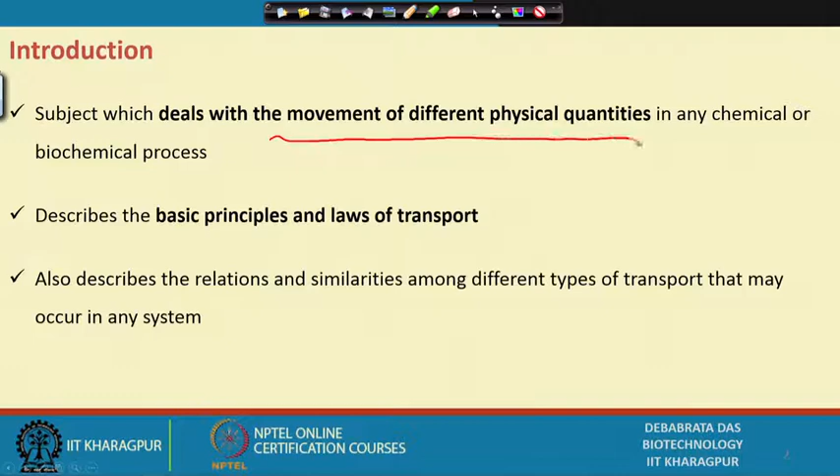Now let me start with this: the subject deals with the movement of different physical quantities in any chemical and biochemical process. I told you there are three types of movement: momentum, heat transfer, and mass transfer.

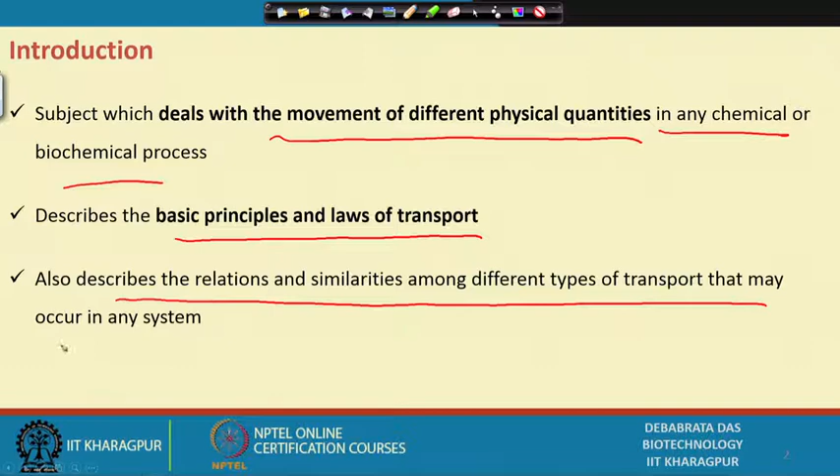We will describe the basic principles and laws of transport, and also describe the relation and similarity among the different types of transport that may occur in any system. Let us see the classification of transport phenomena. We have three different classifications: momentum transport, energy transport, and mass transport.

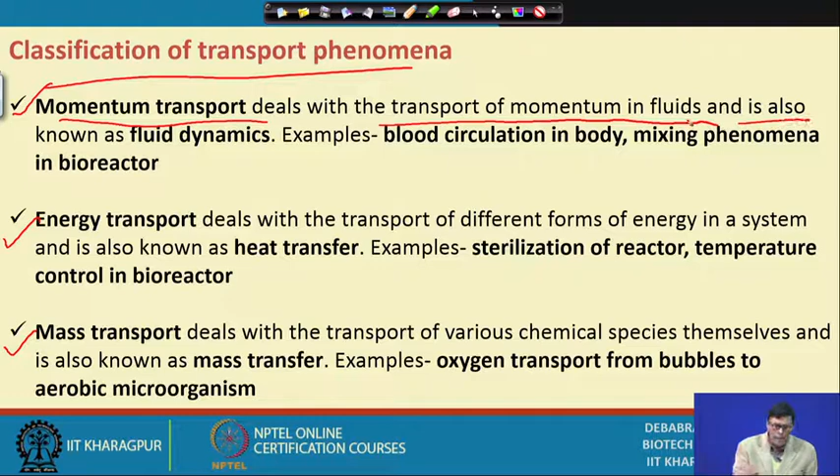What is momentum transport? It deals with the transport of momentum of fluid and is also known as fluid dynamics. For example, blood circulation in the body, and mixing phenomena in the bioreactor, both come under momentum transport, because this is very easy to understand. The mixing phenomena I just explained.

Energy transport deals with the transport of different forms of energy in a system, and is also known as heat transfer, for example sterilization. I forgot to mention that the sterility of the reactor is very important, because we want to grow our desired organism in a particular environment so that we can get the desired product.

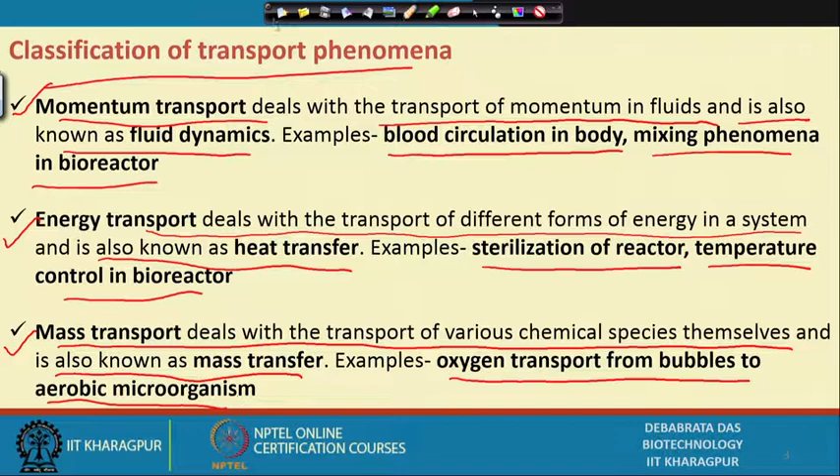Also temperature control in the bioreactor is important. Organisms are very specific with respect to temperature — at a particular temperature they give the maximum product. Mass transfer deals with the transport of various chemical species, as for example oxygen transferred from the bubble to the aerobic microorganism. So we can easily understand how crucial the transport phenomena is as far as biochemical processes are concerned.

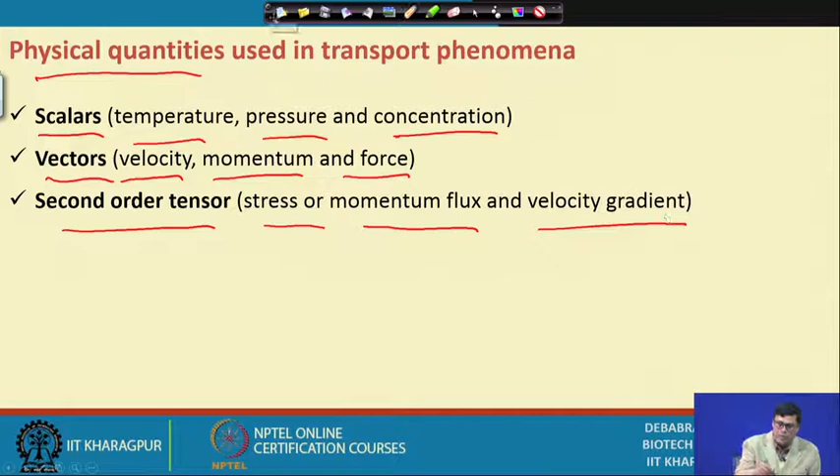Now when you try to solve it, we come across different physical quantities. One is scalar — scalar means it has some value, as for example temperature, pressure, and concentration. Vectors have some direction, like velocity, momentum, and force. And second order tensor is the stress or momentum flux, and velocity gradient. These are the different quantities we use while describing transport phenomena.

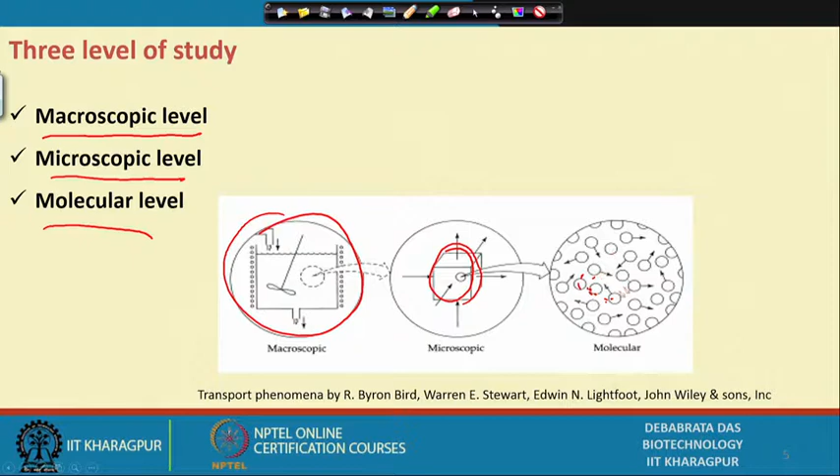Now if you look at the three levels of study: one is macroscopic level, another microscopic level, and the molecular level. In the macroscopic level, you study what is happening inside the fermenter. Then you might use some kind of cell, or study a particular portion of the liquid in detail — this is the microscopic analysis. Molecular level means how the molecules inside the cell are interacting with each other to give the product. So these are the three different levels of study.

Now there are three axioms. Mass is conserved, which leads to the equation of continuity. Momentum is conserved, which leads to the equation of motion. Energy is conserved, which leads to the equation of thermal energy. These three equations are collectively called governing equations. On the basis of mass conservation, momentum conservation, and energy conservation, we can try to solve this.

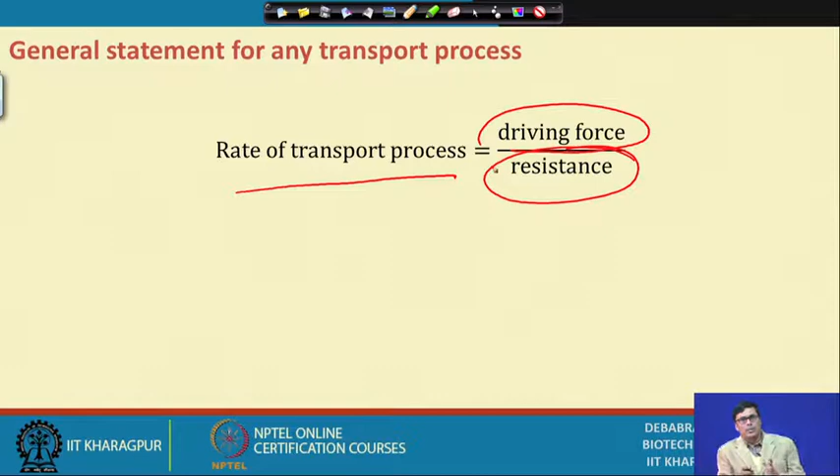Now, the general statement of transport processes: the rate of a transport process is the driving force divided by resistance. Driving force means, suppose you want to heat some liquid — what is the driving force? The driving force is the temperature difference, and resistance is the media that hinders that flow of heat.

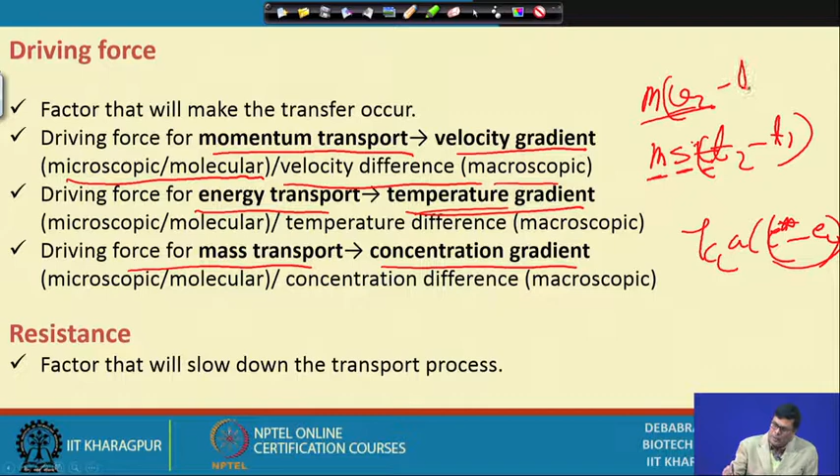Now we can explain this driving force like this. The factor that makes the driving force for momentum transport is the velocity gradient, whether microscopic or molecular — a velocity difference. Momentum, as we understand, is mass into velocity, so the velocity gradient plays a very important role. For energy transport, the driving force is the temperature gradient — we know MST, where mass is specific heat and temperature, so the temperature gradient plays a very important role. And the driving force for mass transfer is the concentration gradient, like KLA into C star minus CL — that is the gradient. Similarly for heat, T2 minus T1 is the gradient, and for momentum, V2 minus V1 is the gradient — these are the driving forces we have.

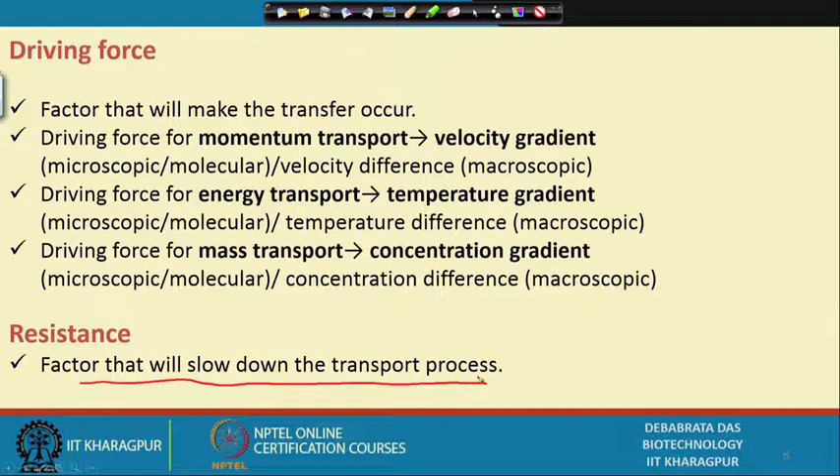The resistance factor is what slows down the transport — the purpose of resistance is to slow down the transport processes. Interestingly, the mechanism of transportation — momentum, heat, and mass transfer phenomena — usually takes place by two different means: molecular transfer and convective transfer. In case of heat transfer, another mode of transport exists, called radiation, which is not applicable in case of mass and momentum transfer. Radiation transfer is applicable only in case of heat transfer, and is not much important for momentum and mass transfer phenomena.

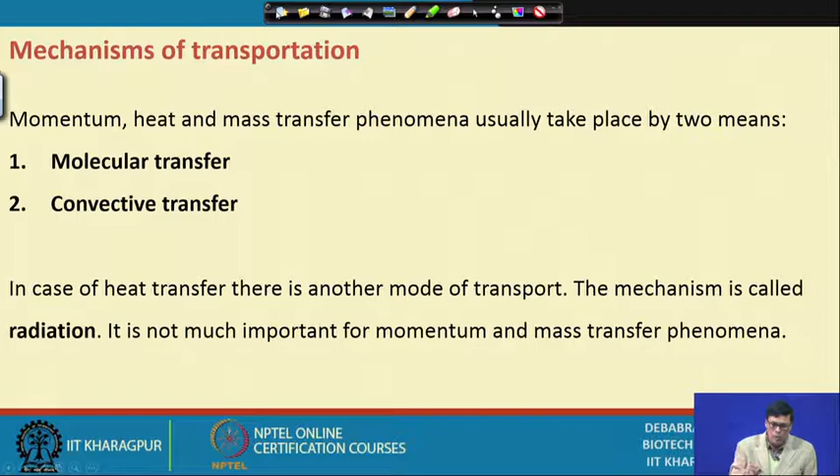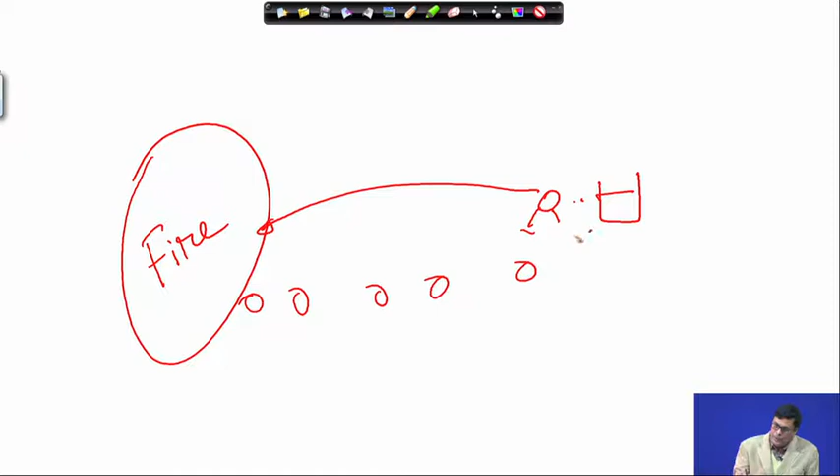Now let me explain more elaborately what this means, with a small example. Suppose there is a fire here — we want to extinguish the fire. The fire can be extinguished by three different phenomena. One is, we know water is the best media through which we can extinguish fire. So we have a bucket of water, and this bucket of water can be transferred in three different ways. One person can carry it directly to the field. Another way, different people can stand in a line and hand over this bucket from one to another to transfer it.

Another way, we can use a pump. With the help of a pump, we can pass this water. So three different means we can do that. Now if you look at these three different means, they serve three different purposes.

Here the person is physically moving with the material. Am I right? This is with material, they are moving. But here the person is not moving, but the material is moving - that is 1, 2, 3, like this. And here with the help of a pump you are doing this. This particular pumping can be explained with the help of what you call radiation, and these particular things may be considered as conduction, and this is considered as convection.

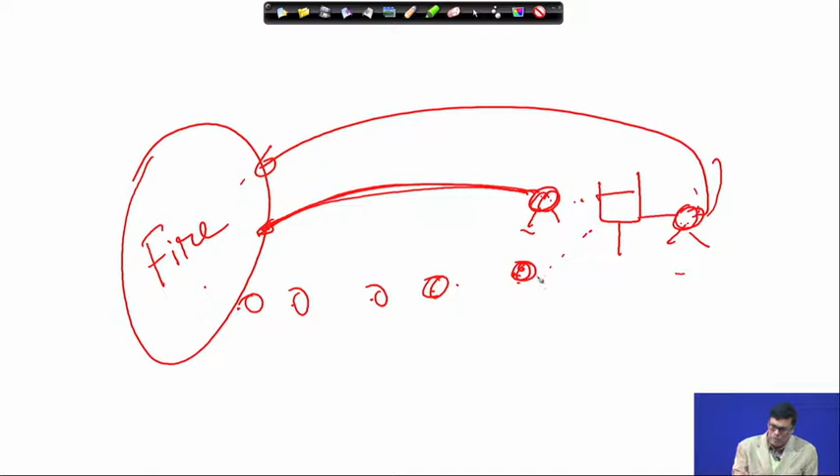Now if you transfer molecular momentum, how can you calculate it? Suppose there are two plates - this is one plate and this is one plate. Stagnant water is there between them. All of a sudden you move this bottom plate, then what will happen? The velocity of the fluid will be like this - the profile will be like this.

This can be explained with the help of Newton's law of viscosity. This is the shear stress, am I right? And this is the shear rate. So this is equal to mu into this. And what is mu? Mu is considered the viscosity of the liquid. So viscosity is basically nothing but shear stress divided by shear rate.

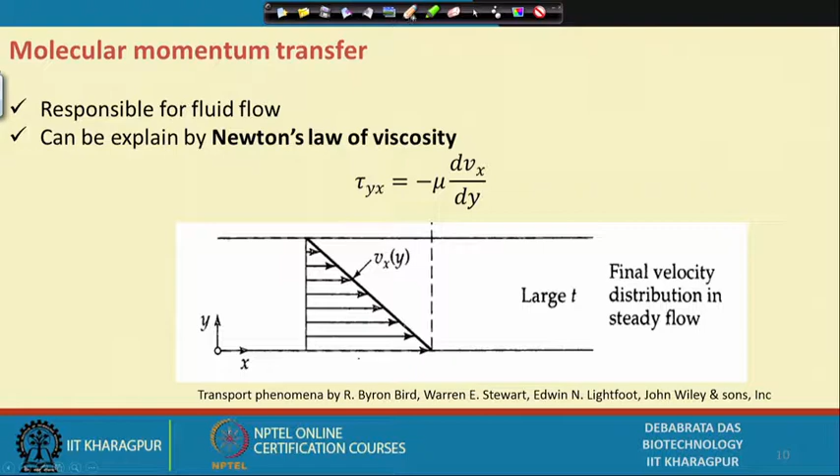The viscosity is the proportionality constant of Newton's law of viscosity. It is a measurement of resistance to gradual deformation by shear stress. For example, honey has much higher viscosity than water, and also called dynamic viscosity.

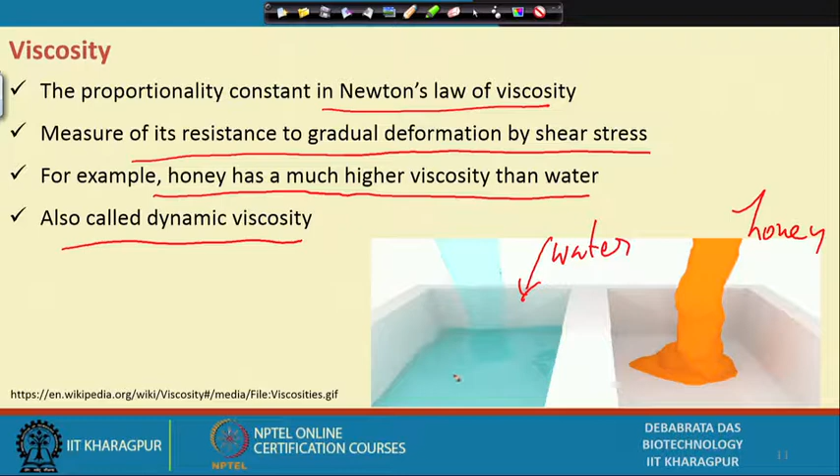So here if you look at the pouring of water - this is water, and this is honey, am I right? Honey has higher viscosity, so the way it pours is different, while water is spreading very easily. So this is how we can explain that.

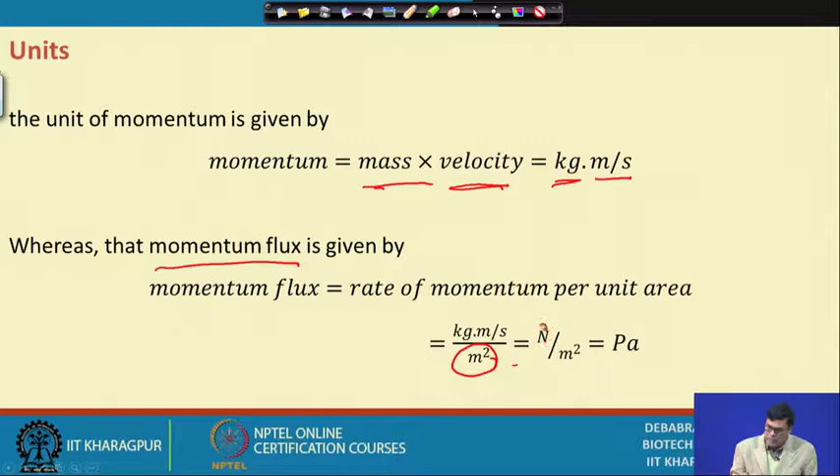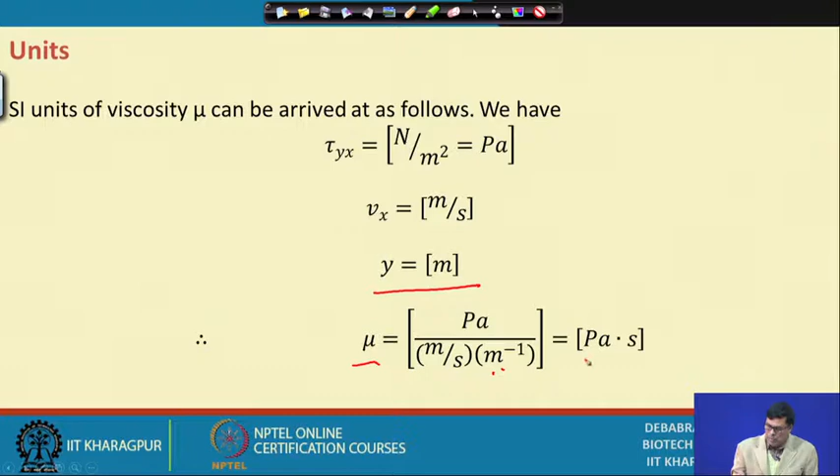This is usually expressed as Pascal. Now shear stress, as I told you, is nothing but Newton per unit surface area - this is Pascal. And this is the velocity, Vx is the direction, because if you look at the direction of flow, maybe this is x, this might be y, or this might be z, and this might be y - it can move in different directions. So this is the x direction. Y is in meters, and viscosity is equal to Pascal per meter per second, and meter inverse, so Pascal second. Now similarly we can find out what should be the unit for viscosity.

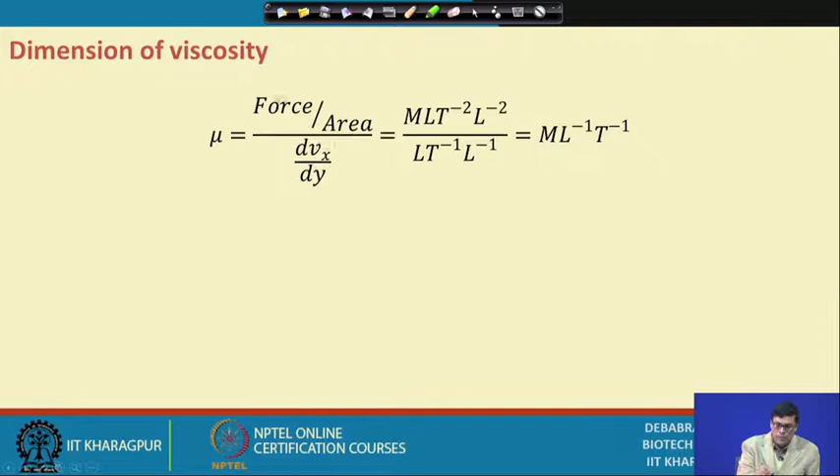This is, as I told you, shear stress by shear rate. If you solve, we will get this equation. Now, Newtonian fluid - what do you mean by Newtonian fluid? Fluid which obeys Newton's law of viscosity. All gases, most liquids which have simpler molecular formula and lower molecular weight, such as water, benzene, ethyl alcohol, carbon tetrachloride, hexane, and most solutions of simple molecules are Newtonian fluids. So this is how Newtonian fluid can be defined.

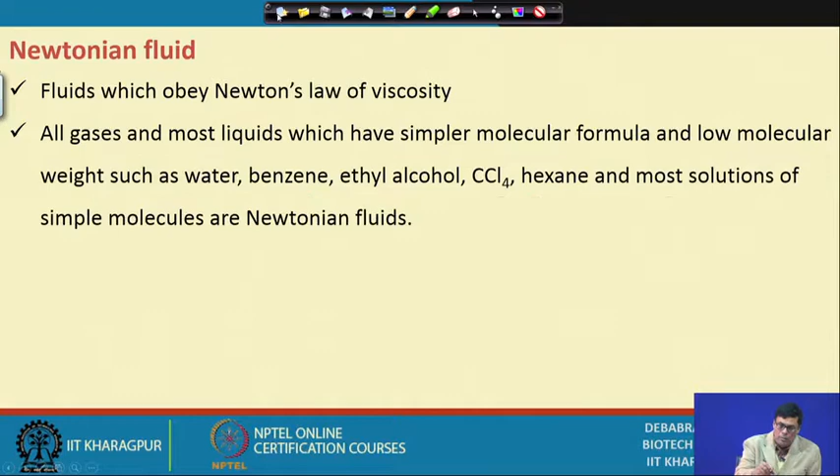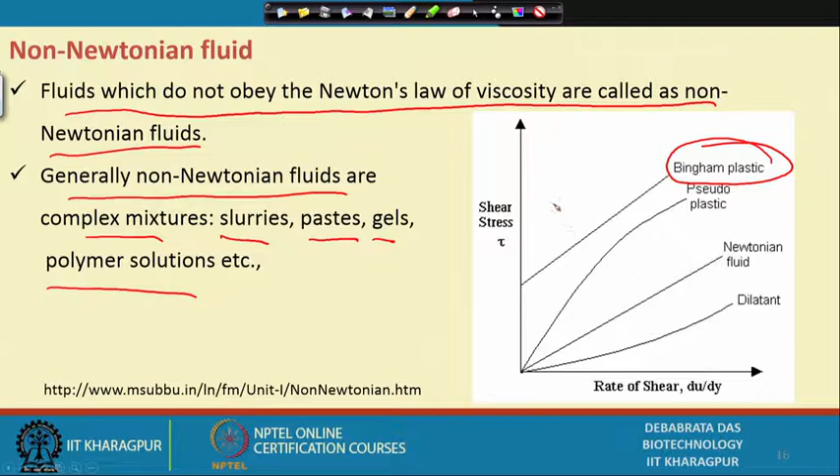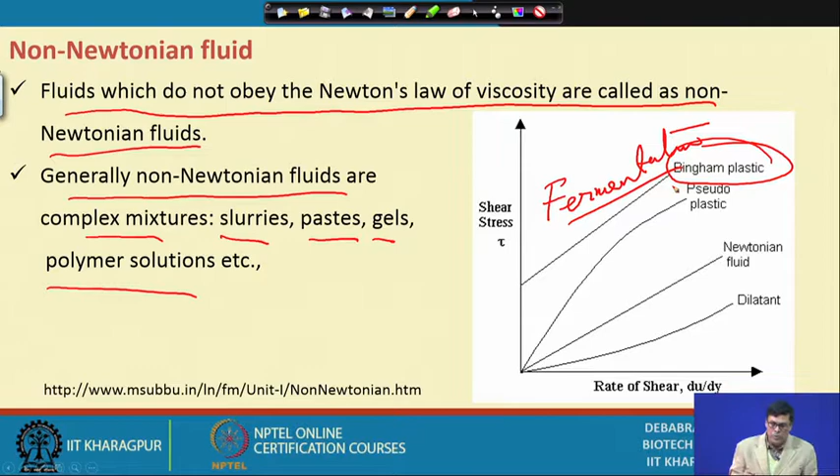Some fermentation broth behaves like Bingham plastics, so this is also a non-Newtonian fluid. It is not Newtonian; if it were Newtonian, it would follow this relation.

Now convective momentum transfer, which I already explained to you. The transportation can be done from the bulk flow of the fluid, and that fluid enters with the velocity Vx. Then what will the momentum be?

This is Vx into rho, Vx into rho into V. What is rho into V? V is the volume, and rho is the mass per unit volume. Volume will cancel, leaving mass. Mass into velocity gives the momentum flux per unit volume.

Similarly, for the velocity in the y and z directions, we can have momentum flux like Vy rho V and Vz rho V. We know that when we multiply this flux by the perpendicular area, we can calculate the force, as I have already shown you before.

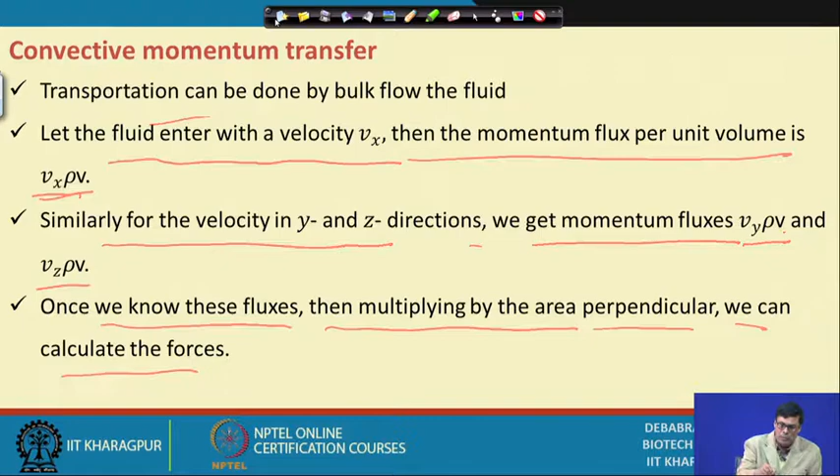There are different boundary conditions at the solid-liquid interface. There will be no-slip flow, and in case of a liquid-liquid interface, free-slip flow occurs. At a gas-liquid interface, the shear stress will be zero. That is the boundary condition we have.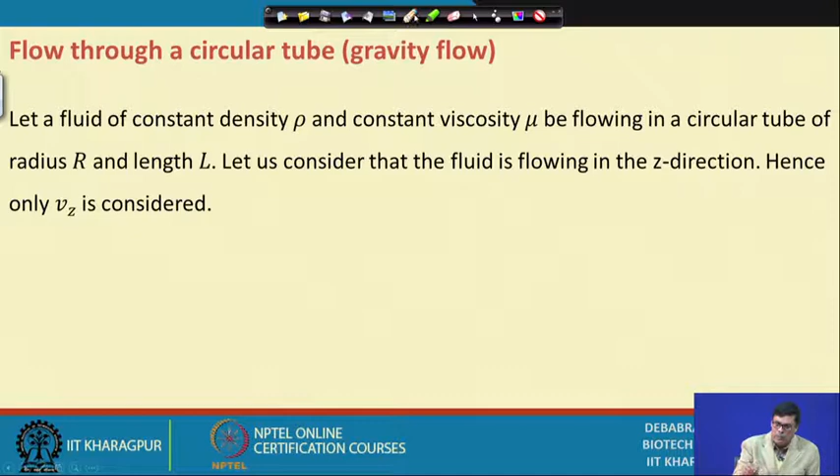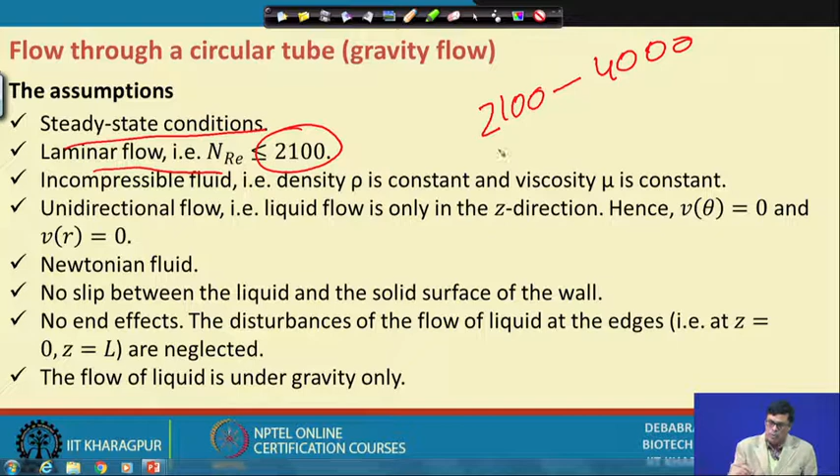For the flow through the circular tube, the following assumptions are made: one is steady state condition, and laminar flow, which occurs when the Reynolds number is less than 2100. From 2100 to 4000, it is transient - neither laminar nor turbulent - but below that it is Newtonian laminar flow. At 4000 we have turbulent flow.

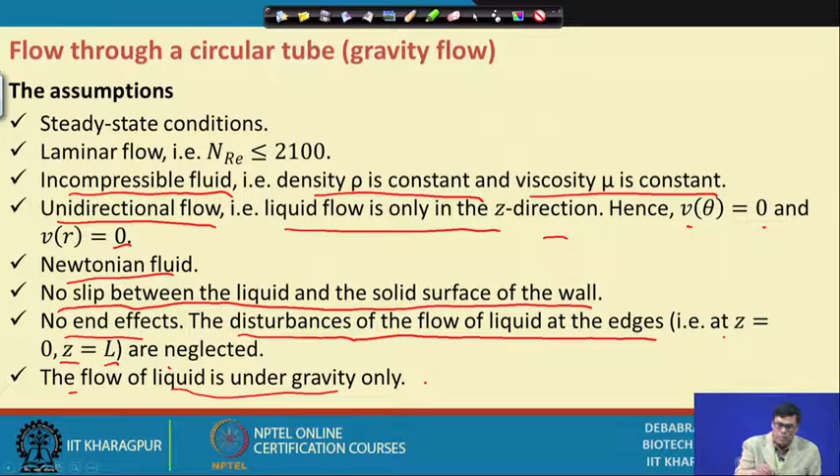The fluid is incompressible, so density is constant and viscosity is also constant. For unidirectional flow, the liquid flows only in the z direction, so v theta equals 0 and Vr equals 0. It is Newtonian fluid, with no slip between the liquid and the solid surface of the wall, no end effects - disturbances of flow at the edges where z equals 0 and z equals L are neglected, and the flow of the liquid is under gravity only. These are the assumptions we made to analyze this fluid.

Now let me explain the flow through the circular tube. Under these assumptions, the momentum is considered as follows: the molecular momentum flux is tau Rz, and tau theta z equal to 0 and tau zz equal to 0, we assume this.

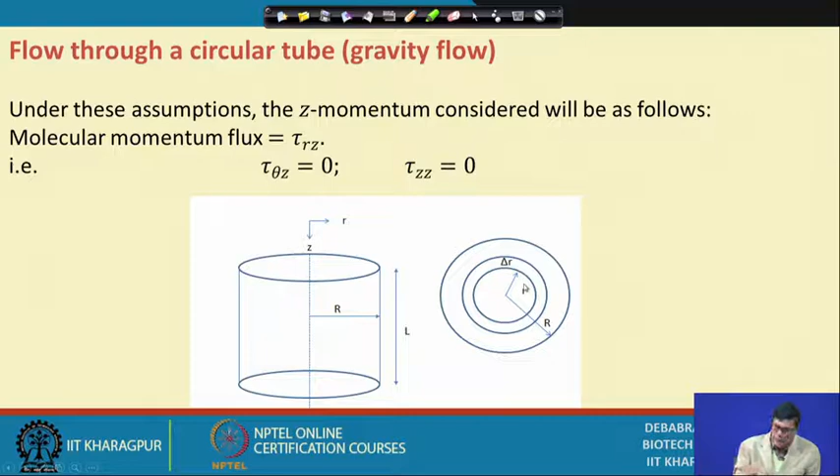Here we also consider a segment - you can see this segment, this is the del R we consider, so we integrate from R to R plus del R.

So the flow through the circular tube can be explained as: rate of molecular momentum in across the cylindrical surface at R, minus rate of molecular momentum out across the cylinder at R plus del R, plus the gravity force acting on the fluid - this should be equal to 0.

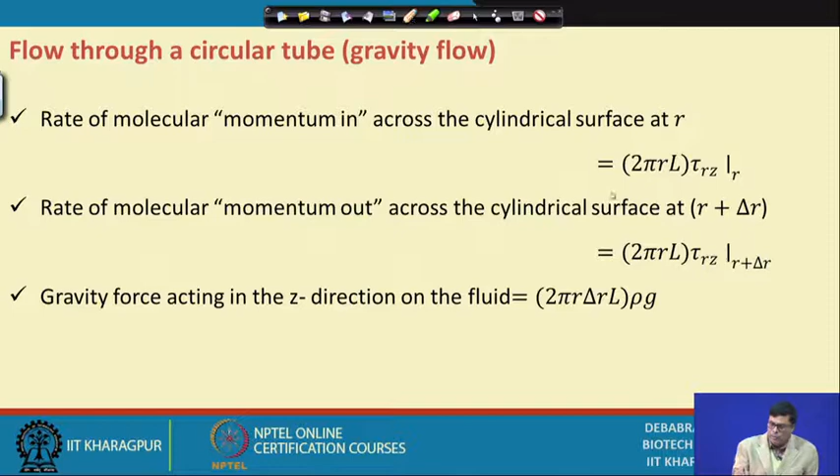Now the rate of molecular momentum in can be explained like this - this is the surface area, per unit surface area, so tau Rz at R. Then this is at R plus del R, and for the gravitational term, you multiply by rho g to get the gravitational force acting in the z direction on the fluid.

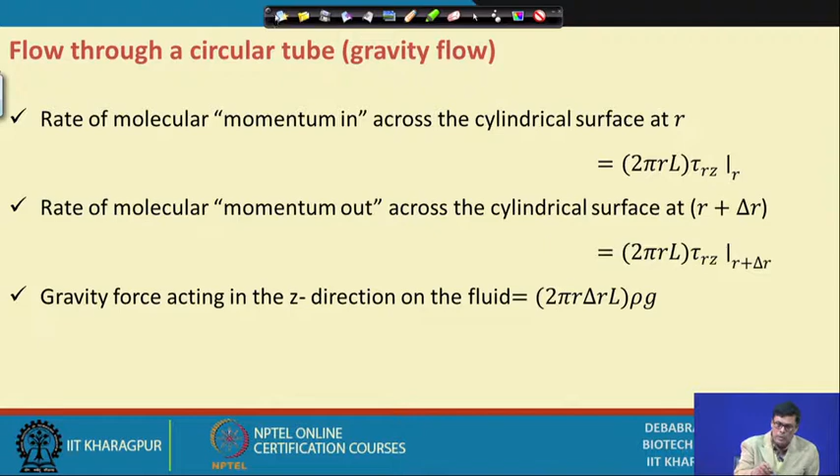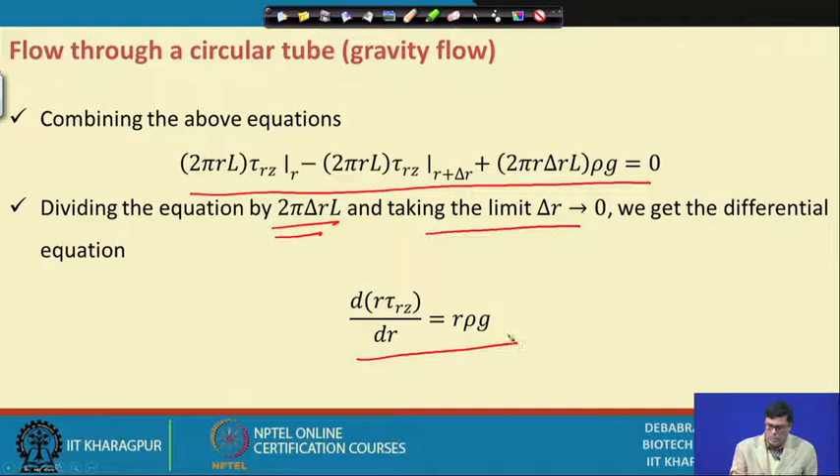Now combining this whole equation, we get it equal to 0. We divide by 2 pi del R into L, and taking del R tends to 0, we get this differential equation, which simplifies to R rho into g.

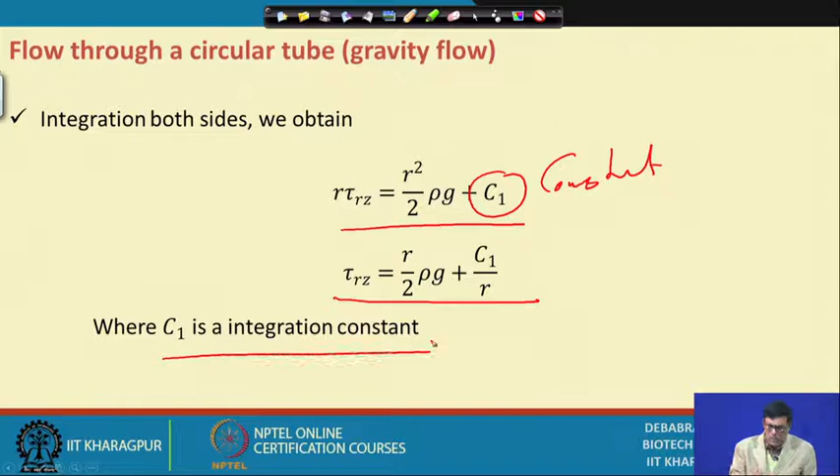Then through integration, if you look here, we do the integration and get this result, where C1 is the constant. Then dividing by R, we get this equation, where C1 is the integration constant. So for flow through the circular tube, what happens if R equals 0?

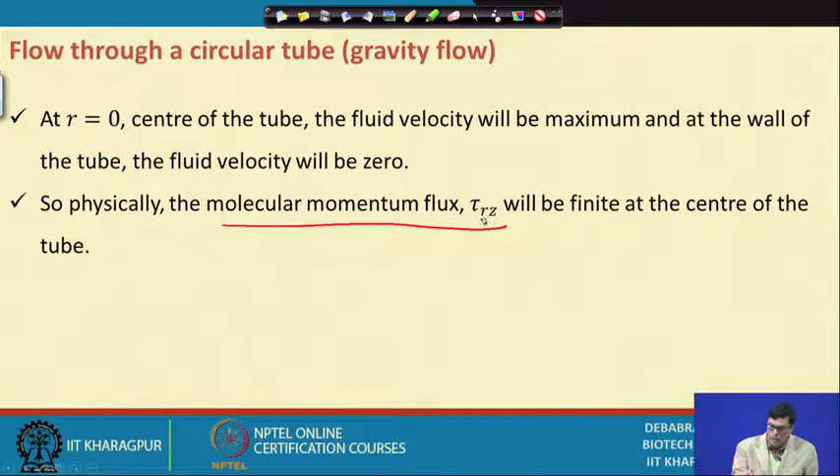If R equal to 0, at the center of the tube, the fluid velocity will be maximum. Why? Because at the center there is less friction. As you come close to the wall, there will be friction between the wall and the liquid, so the velocity will be affected. So physically, the molecular momentum flux, tau Rz, will be finite at the center of the tube.

Now for flow through the tube, we can find the boundary conditions: at R equal to 0, tau Rz is finite, and C1 must be equal to 0, otherwise the momentum flux will be infinity at the center of the tube. Therefore we can write tau Rz equal to R by 2 rho into g. Applying Newton's law of viscosity, we can find this is equal to...

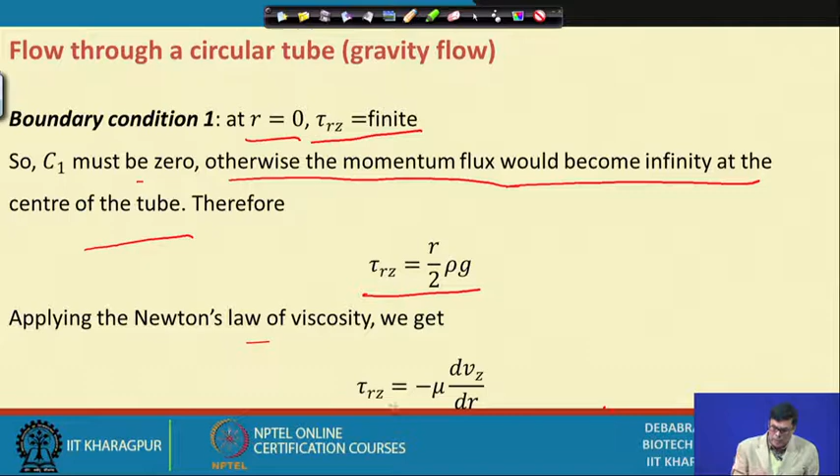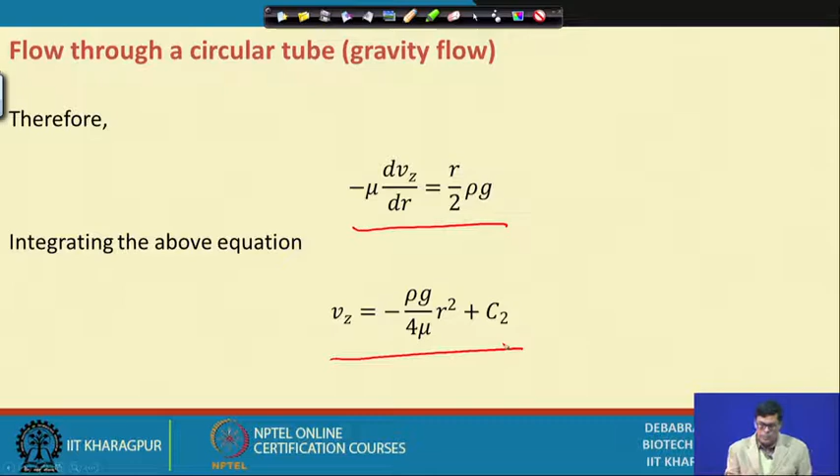We already know this from before. Now we can write this equal to this, as shown here, and from this we derive the equation that Vz equals this, where C2 is the integration constant. Applying the boundary condition at small r equal to capital R, Vz equal to 0, the equation becomes this, and C2 will be this. Combining, we get this equation, and taking the common term, the final equation will be this.

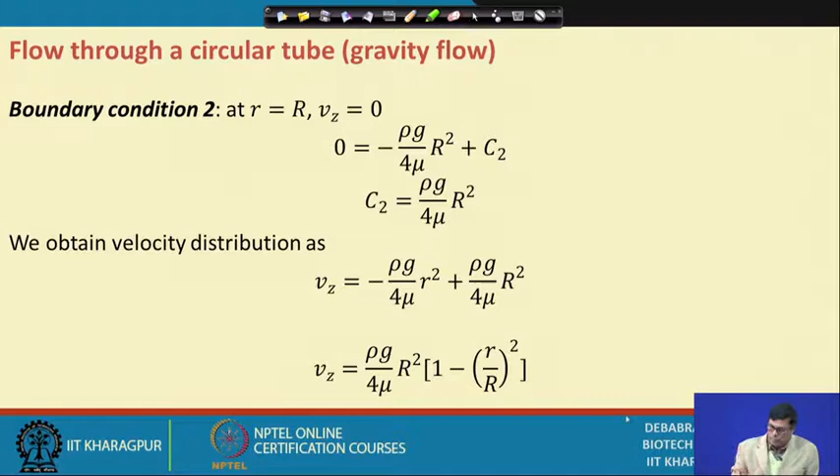Now, for flow through a circular tube, this is the velocity profile in laminar flow for an incompressible Newtonian liquid. What I want to show is that as the liquid flows through this pipeline, it will look like this.

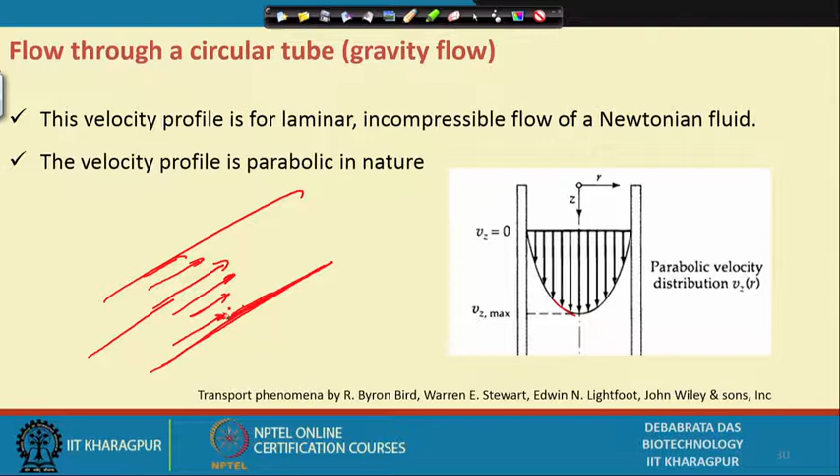Why is this so? Because as the liquid comes close to the wall of the tube, there will be friction between the liquid and the wall, so the velocity will be retarded. This results in the parabolic velocity distribution that we obtain.

One important parameter used to characterize the flow characteristics of the fluid is the Reynolds number, which can be expressed as du rho by mu. Here du represents the inertia force, and mu by rho represents the viscous force. So the Reynolds number is nothing but the ratio between the inertia force and the viscous force.

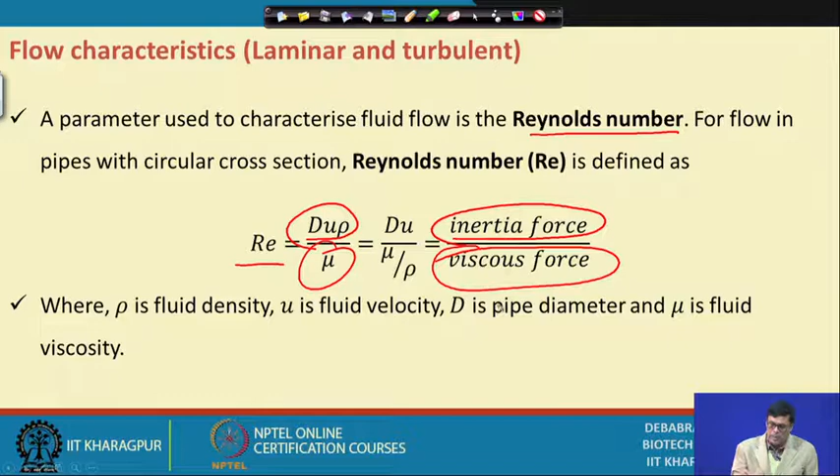As I was saying, if the Reynolds number is less than 2100 it is laminar flow, if it is more than 4000 we call it turbulent flow, and if it lies in between, it is neither laminar nor turbulent, this is the transition flow, between 2100 and 4000.

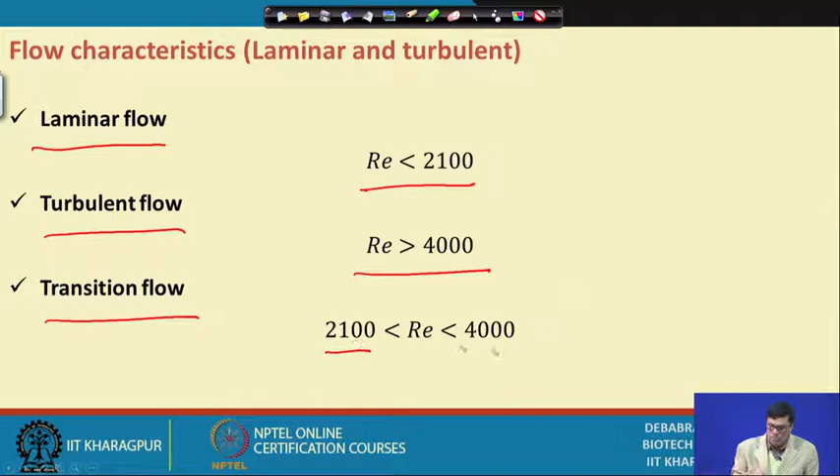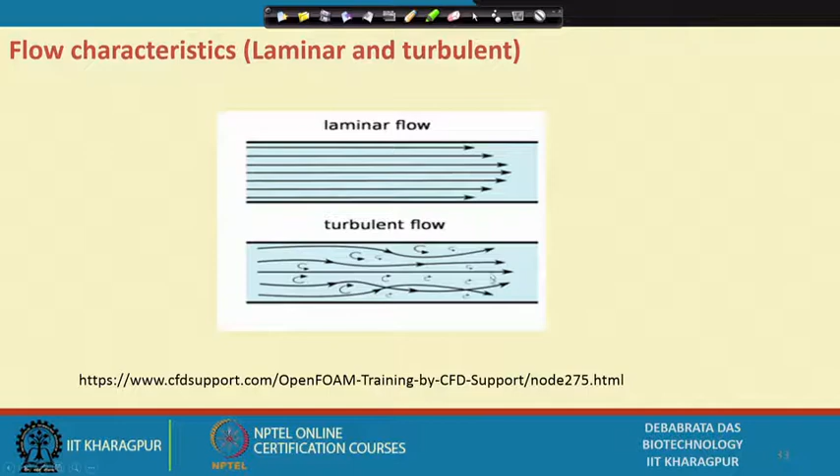This is the pattern we have: in laminar flow we clearly see the velocity gradient, and this velocity gradient is minimized when we have turbulent flow. When the velocity of the fluid is maximum, the velocity gradient is reduced to a great extent compared to laminar flow.

In this lecture we try to cover a new topic, transport phenomena in bioprocess. Transport phenomena plays a very important role in biological processes through three approaches: momentum transfer, heat transfer, and mass transfer. Momentum transfer is applicable for mixing of the fluid, which is very much required in biochemical industries, for how cells remain in suspension and how ingredients added to the media disperse quickly.

Then we have heat transfer, because organisms are very sensitive to temperature, so temperature must be maintained; heat transfer plays a very important role. And mass transfer: in aerobic fermentation processes, we require proper dissolved oxygen concentration for the growth of the microorganism, because oxygen is sparingly soluble in water. All these transport phenomena can be explained.

But first, in this lecture, I try to discuss momentum transfer, how different parameters are involved, and we try to correlate them. We try to find out what viscosity is. Viscosity of the fluid is nothing but the ratio of shear stress by shear rate.